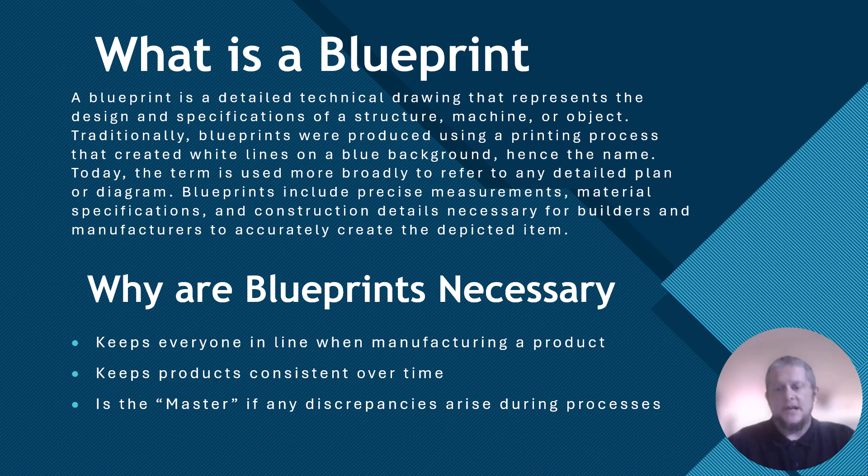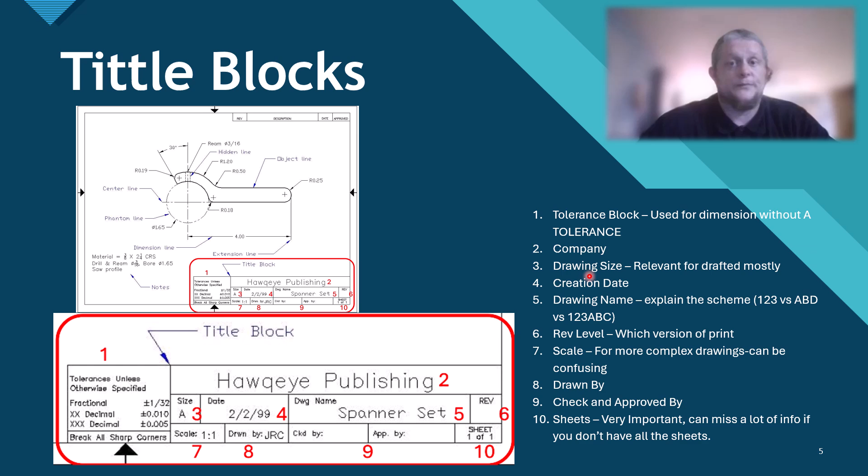So it's kind of a mini title block condensed down. It's generally just a running log of the changes that have happened on the print. So if you want to see why this dimension changed, or you remember it being a different dimension, check the revision log. It probably got updated.

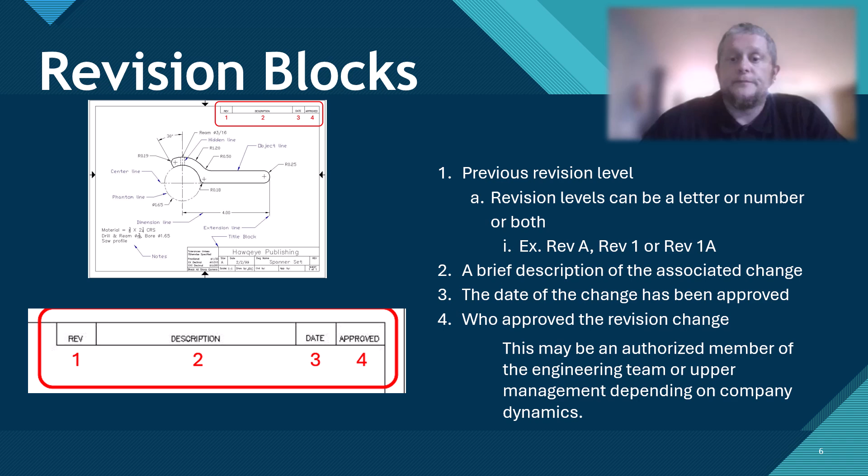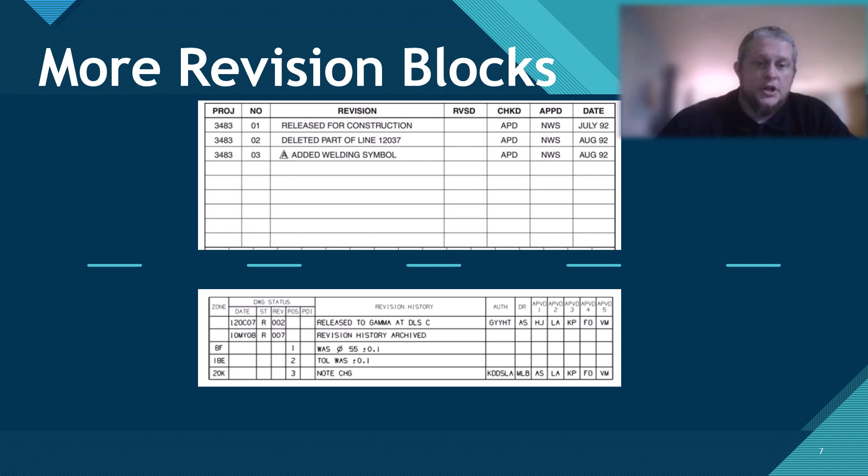They can be in the top left, they can be above the title block, heck, they can even be just an arrow with something written there, like Surface Finish, RA16, specifying a note for a specific part or feature.

And another little quirk of these is they can have what they call note flags, and we'll have an example in the next slide. That's basically where they just tie a triangle to note 1 and a triangle to a dimension, and it says this dimension has a note 1, and you just connect triangles at that point.

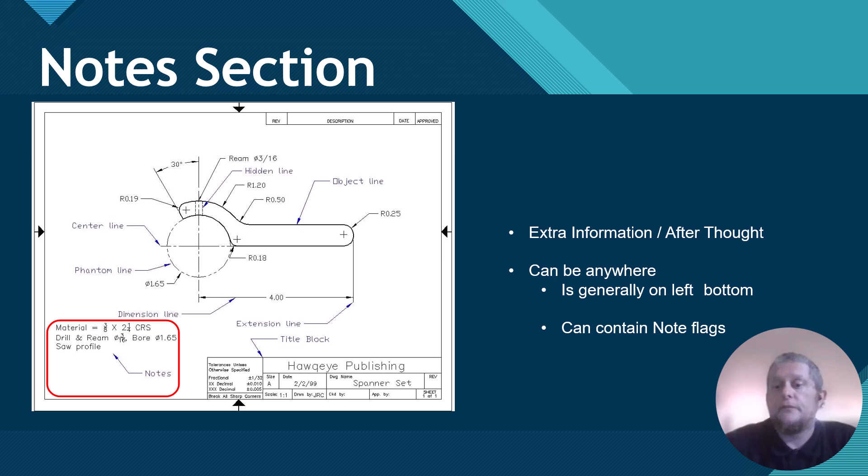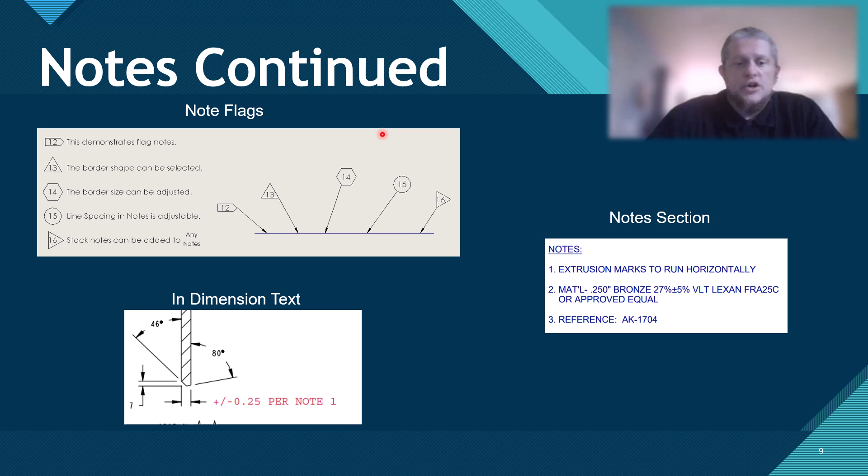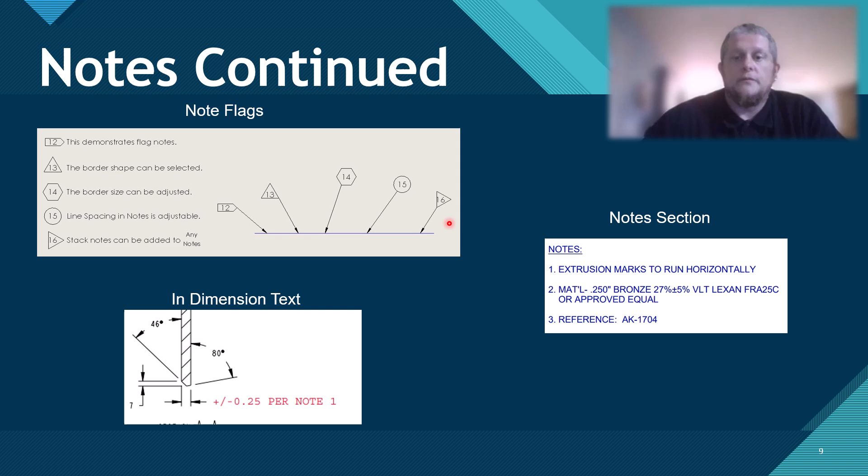They can look like any of these. So it could have a note where a dimension should be, just like this example. So the circle, a hexagon, a triangle, a little flag, sideways triangle. That depends on the company. It's not really standardized. So if you see a triangle, more likely it refers to a note. That seems to be the common practice that I've run into.

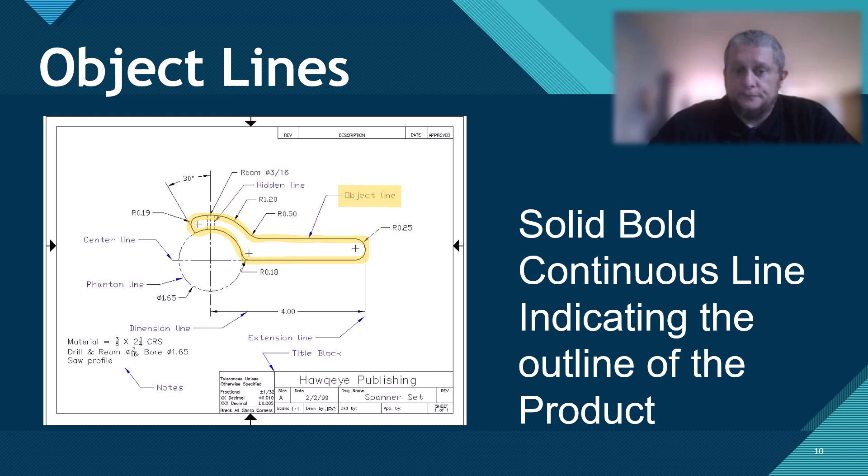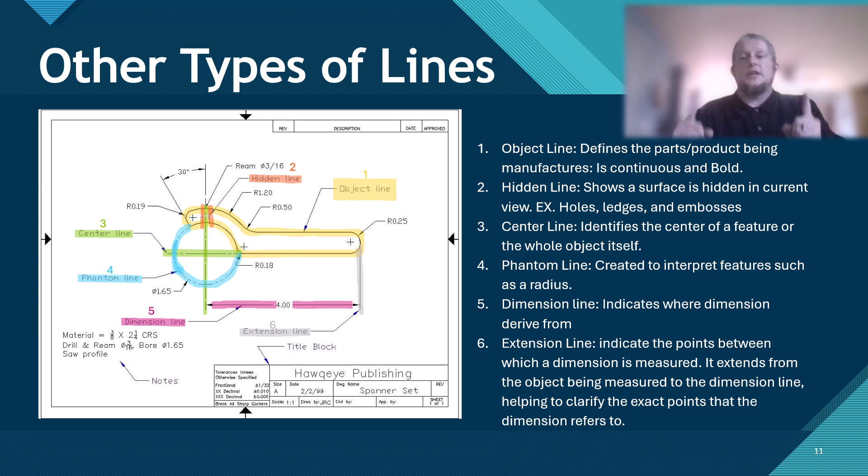So number 5 in purple is the lines coming from the numbers. Those are called dimension lines. And number 6, the gray on the right hand side going to the green center line on the left hand side. So if you got the purple lines, you have the gray, and then you have the green. Those two lines are what we call extension lines. They extend to the feature from the dimension reference.

Okay, so then we move on to part orientation. So generally you have 2 part orientations that we use. First angle, third angle. There is a second angle, but that's no bueno here in the US. Most engineers refuse to use that, so you'll hardly ever see that. So if you see it, you might want to read up on it. It's really confusing. But the first angle, third angle is pretty simple.

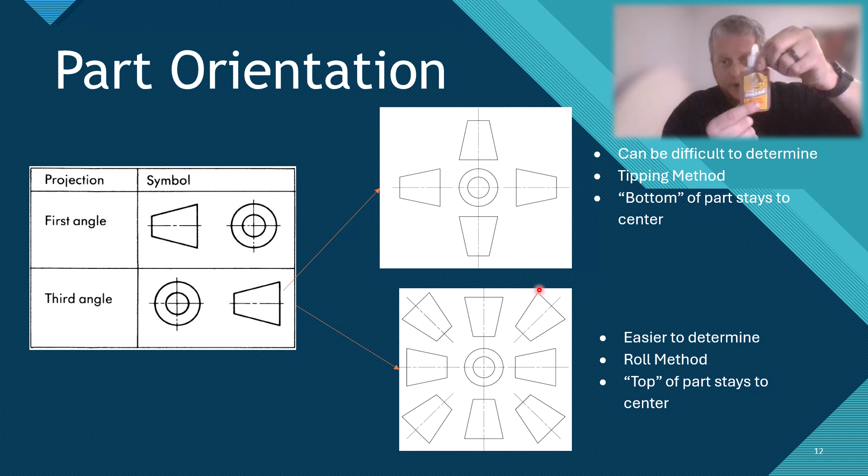But third angle seems like it's confusing, but it's really not once you start getting into the swing of manufacturing. So third angle is the opposite. The top of the part always stays oriented from which it came. They call this the roll method. So what you're going to do, say bottle of glue. So we're going to take it, we're going to hold it like this, and we're just going to roll the bottom to that view.

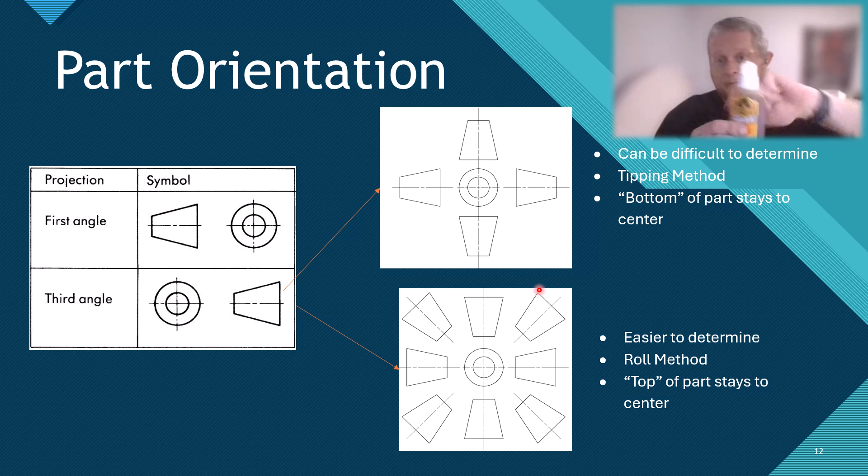And if it's on the left hand side, we're just going to roll the bottom. The top always stays to the side from which it came. Okay, as tipping method, the bottom right here stays from which it came, right here. Okay, practice, practice, practice. That'll help you in the long run.

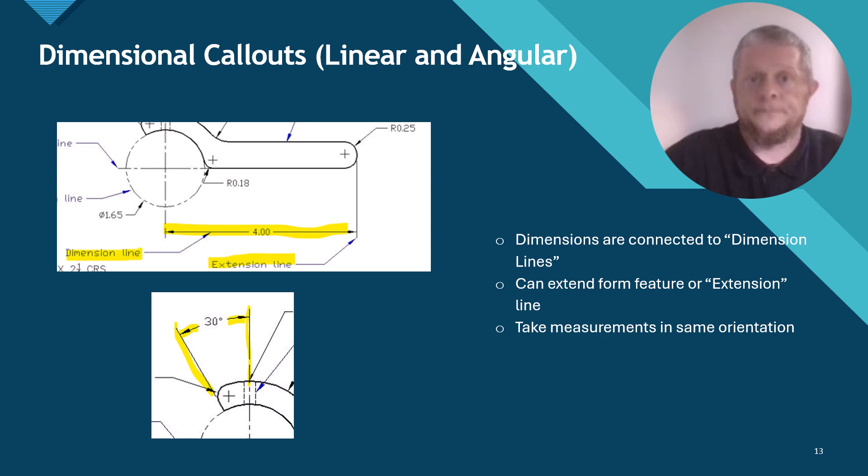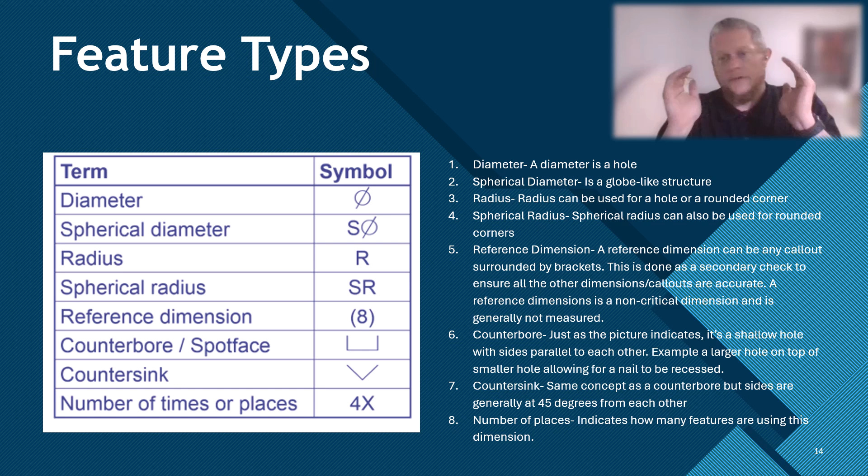So diameter, number one, diameter. It's a circle, like a hole. Spherical diameter, that's going to be more like having a marble on a part or half a marble. A radius is just going to be any type of semicircle. You can actually use a radius and a diameter interchangeably. A spherical radius, again, that's more of a marble, so half the spherical diameter. All right, here's a big one. Reference dimension. So if you see those parentheses around a number, that's saying that dimension should be around in here. No tolerancing required on that.

Okay, two more. Counterbore and countersink. Pretty much the same thing. One's square, one's a V. It's to help sink screws or other mating parts below a surface. So you'd have the square here, the screw would be sunk down below the surface.

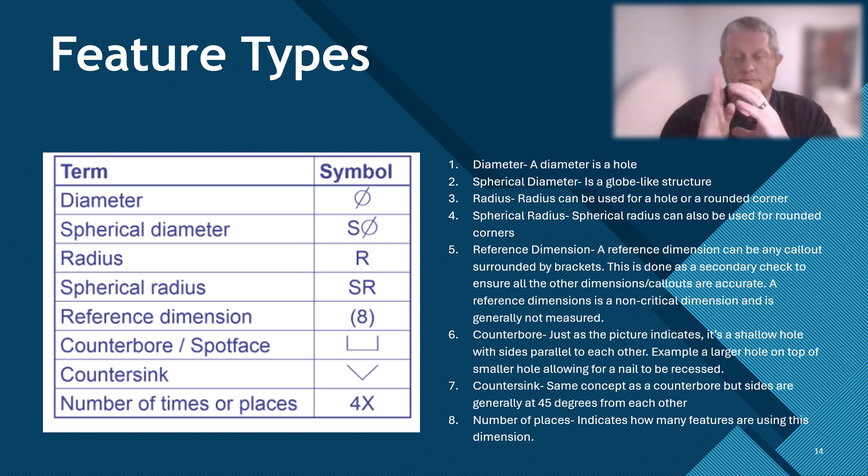And then number of times, this could be 2 times, 3 times, 4 times, 10 times. This just tells you how many holes should be on that surface of the part with that dimension. So it'll say 4 times 1/4 inch. So you should have 4 holes with a 1/4 inch.

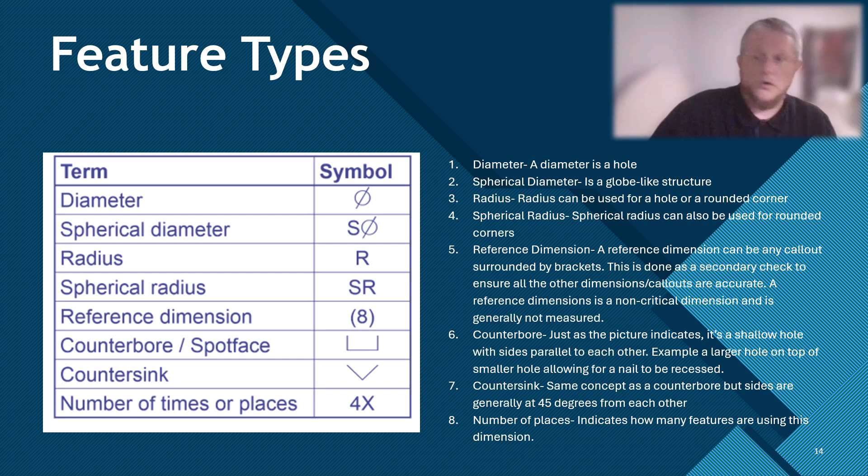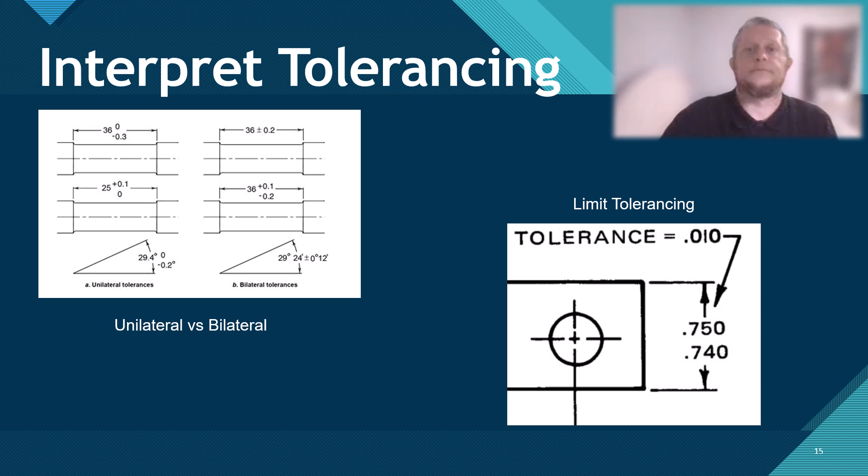Alright, so now that I've taken 20 minutes of your time, hopefully that was helpful in some sense to help get you started on your road to reading blueprints.